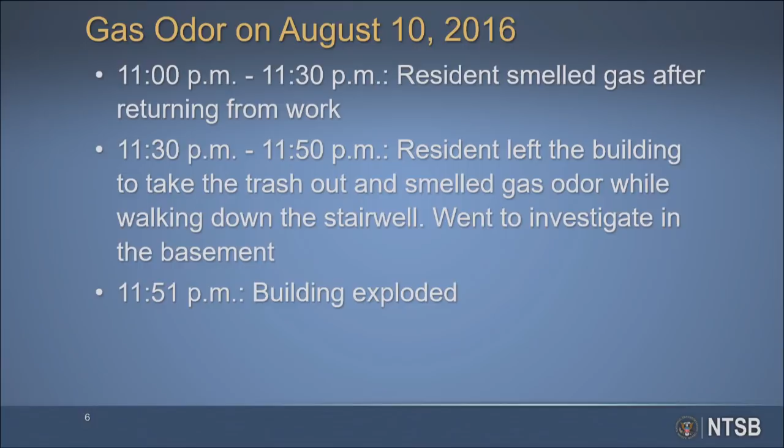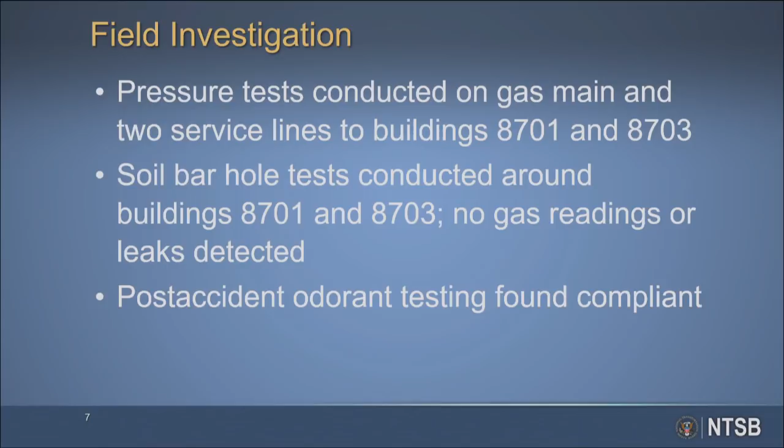NTSB investigators arrived the next day. Washington Gas conducted pressure tests on the gas main and the two service lines to Building 8701 and 8703. They also conducted soil bar hole tests on the main and service lines in the front and back of Buildings 8701 and 8703. No leaks were detected. Post-accident odorant testing was also found compliant with regulatory requirements for odorizing natural gas.

The Bureau of Alcohol, Tobacco, Firearms, and Explosives determined from the blast damage and pattern of debris that the explosion originated from the meter room in the basement of Building 8701. They concluded natural gas was the fuel source of the explosion and ruled out other sources.

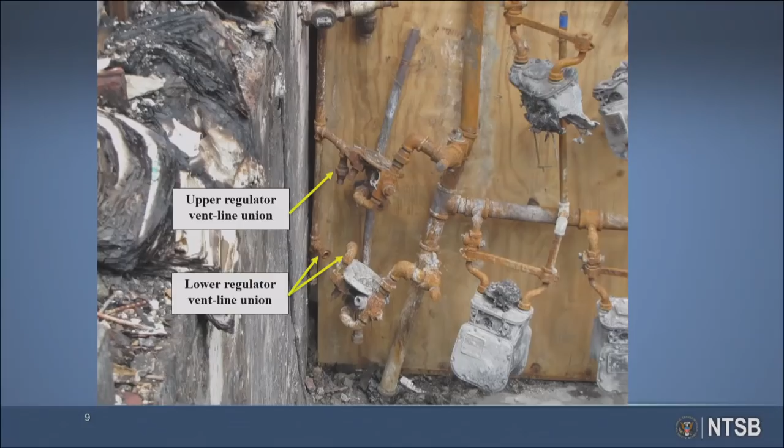Investigators narrowed down two potential areas where natural gas leaks could have occurred in the basement of Building 8701. One area identified was the vent line union connections from the gas meter assembly. Mr. Frank Zakar will discuss this in further detail in his presentation.

Investigators also considered a commercial water heater as a potential source of fuel, but there was no evidence that the water heater and its associated piping failed prior to the explosion.

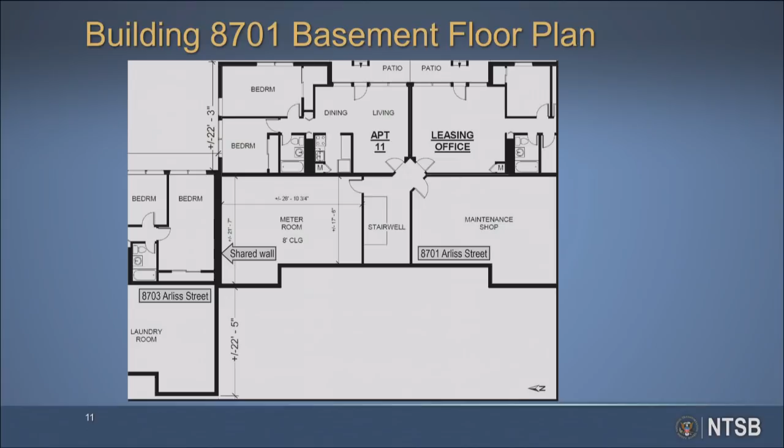Here is the floor plan for the basement of Building 8701, which included one apartment, a leasing office, a maintenance shop, and the meter room where the gas meter assembly and water heater was located. Right above the basement level were 12 other apartments located on floors 1, 2, and 3. The arrow indicates the shared wall between Buildings 8701 and 8703, where the gas meter assembly was located.

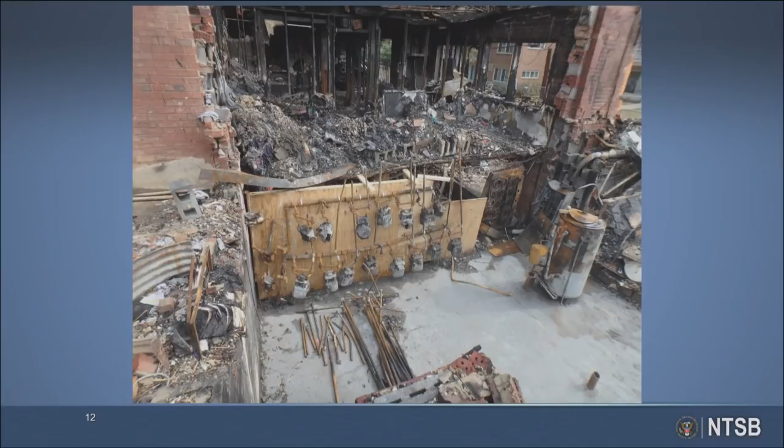Here is the ATF's reconstruction of the meter room in Building 8701 after the debris was removed. The gas meter assembly, the electric meter rack, and water heater were placed in its likely pre-explosion location. The gas meter assembly consisted of 15 meters that serviced 13 apartments, the maintenance shop, and leasing office. Mr. Zakar will also discuss this further in his presentation.

The safety issues for this investigation include the location of service regulators within a structure, the inspection of the gas meter assembly, notification of natural gas odor to the gas company, and natural gas detection methods.

The parties to the investigation are the Pipeline and Hazardous Materials Safety Administration, the Maryland Public Service Commission, the Montgomery County Fire and Rescue Service, the Montgomery County Police Department, and the Washington Gas Light Company.

I will turn it over now to Mr. Frank Zakar to discuss the laboratory examination of the equipment.

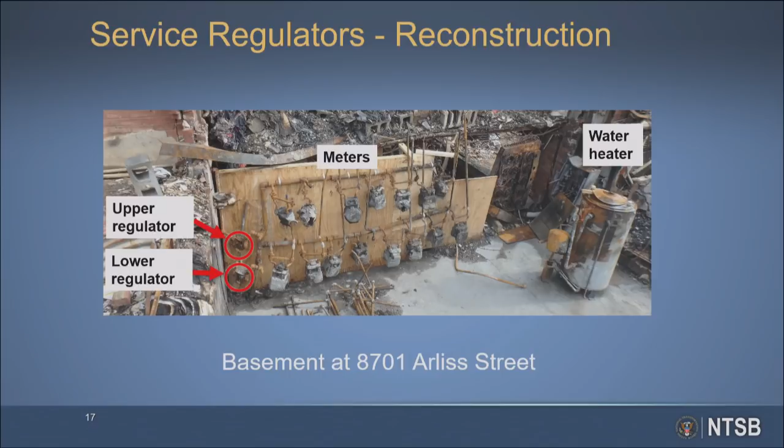In this presentation, I will discuss the examination of the Mercury service regulators and their respective union assemblies. This photograph shows the reconstructed configuration of the two service regulators, meters, water heater, at 8701 Arliss Street prior to the accident. The two service regulators were referred to as the upper and lower service regulators.

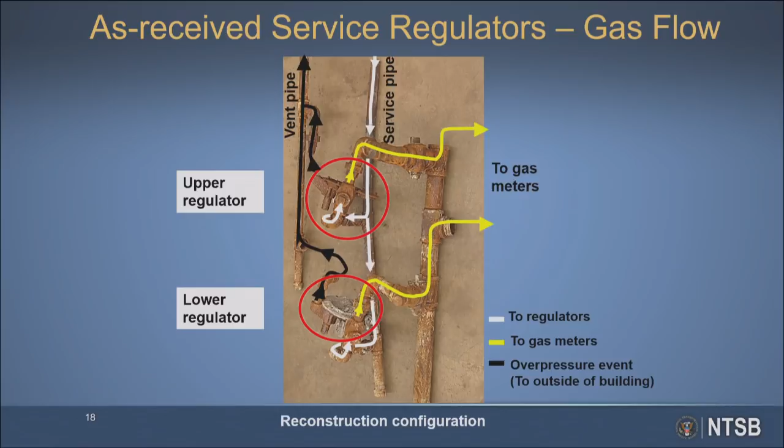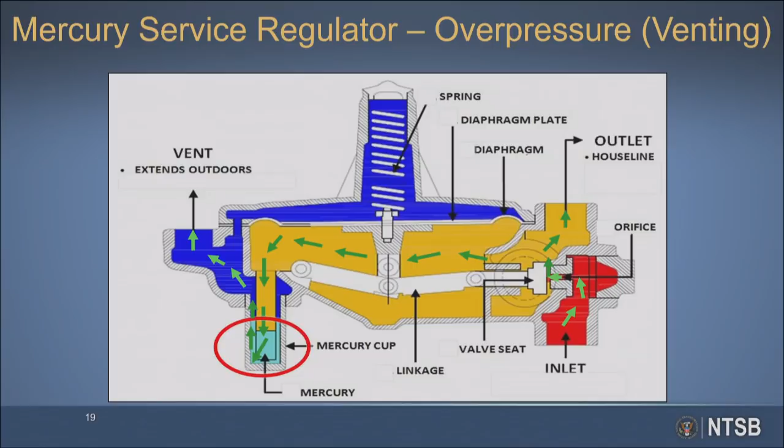Venting can occur when parts within a regulator degrade. For example, insufficient mercury level or a perforated flexible diaphragm can lead to venting. Material buildup between the valve seat and orifice can prevent the valve seat from fully sealing against the orifice, also leading to venting.

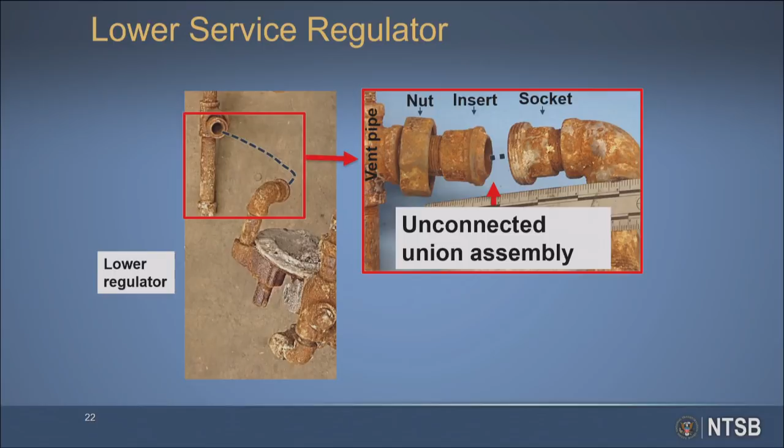The nut was found disconnected from the socket after the accident. When mating threads are pulled apart by force, fracture or deformation by shear of the threads can be expected. However, detailed examination of the internal threads for the nut and external threads for the socket revealed the mating threads showed no evidence of major deformation damage or stripped threads.

Had the force of the explosion, falling debris, or a building collapse caused the disconnect of the lower union assembly, there would be evidence of severe mechanical damage through the engaged threads. Based on the examination, NTSB staff believe that the socket of the lower Mercury service regulator union most likely was not threaded to the nut, and therefore the lower Mercury service regulator was not connected to the vent line prior to the explosion.

Malfunctions can and do occur in service regulators and lead to overpressure events. During an overpressure event, gas will normally flow through the vent line and terminate outside of the building where it dissipates. However, investigators found that the union assembly for the lower regulator was not connected prior to the accident.

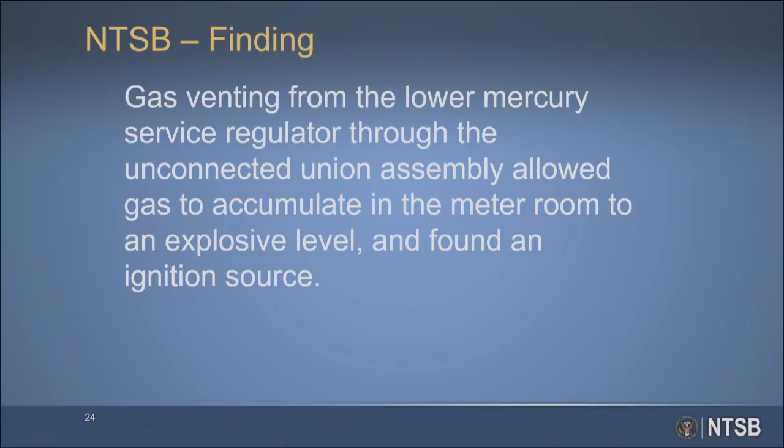NTSB staff believe that the Mercury service regulator past history, the pre-existing unconnected vent line union, the lack of evidence of any pre-existing anomalies in the gas piping or gas appliances indicate that a failed Mercury service regulator was the most likely source of the natural gas release in the meter room at building 8701. The gas accumulated in the meter room to an explosive level and found an ignition source.

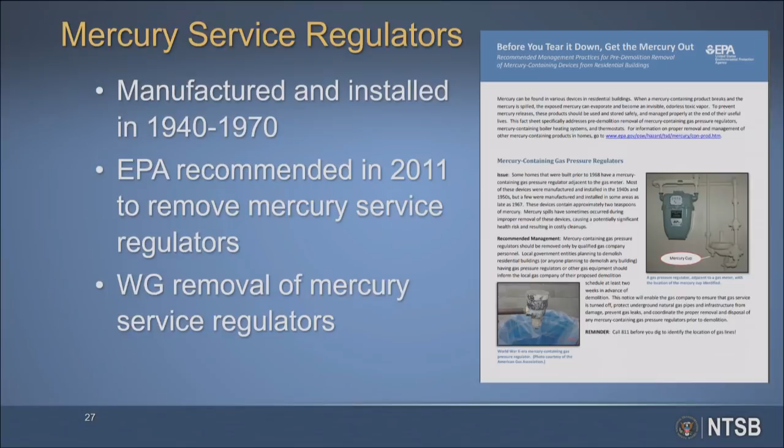Washington Gas has been replacing their mercury regulators over the years. As of December 2018, the company has approximately 125,000 Mercury regulators still in service. While reviewing the Washington Gas records, staff identified errors in the company's field entry forms which did not correctly identify the type of regulator in service. The company relied on unvalidated information to determine the location and condition of its Mercury service regulators. Staff proposes safety recommendations to address this issue.

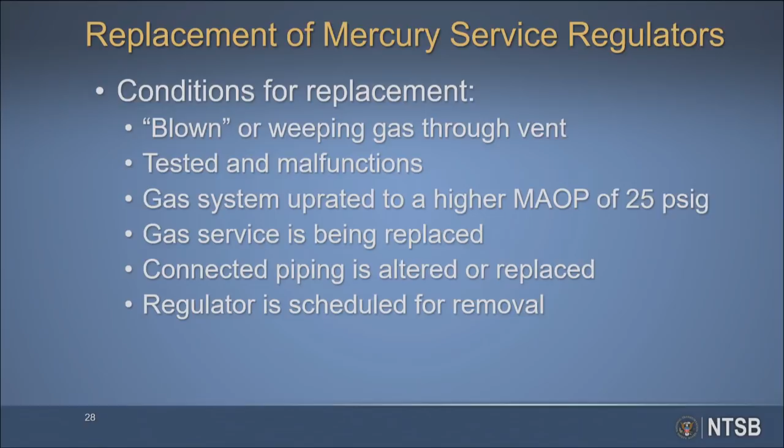In the Washington Gas Operations and Maintenance Manual, the company's procedures list the following conditions to replace a mercury regulator: when a mercury regulator has blown or weeps gas through its vent, when a regulator has been tested and malfunctions, when a gas system is uprated to a higher maximum allowable operating pressure of 25 psig, when gas service is being replaced, such as a meter change, when connected piping is altered or replaced in such a way that it makes it practical to change the regulator, or when the regulator is scheduled for removal.

In the 5 years prior, Washington Gas replaced 992 regulators due to performance failures. The primary failures of mercury service regulators include gas venting or leaking from a body connection or from debris or blockage to the valve seat, or mercury leaking out of the reservoir. Another failure mode Washington Gas has identified can be a torn diaphragm, but that type of failure was not recorded for any regulators found in their system.

Service records for the 5 years prior to the accident show that Washington Gas technicians visited the meter room at Building 8701 on 6 different occasions, 2 of which were to turn on gas service. Washington Gas procedures require mercury service regulators to be tested each time a gas meter is set, reset, or changed. Part of this procedure calls for a vent line test, which involves disconnecting the vent line.

to ensure the line is clear of debris and will appropriately direct the gas to the atmosphere. Washington Gas technicians told investigators that this vent line inspection was generally performed on single-family homes and not on multi-family dwellings such as the Flower Branch apartment complex. They only performed visual tests for debris and the outdoor venting of the lines. They did not check whether the lines were connected properly.

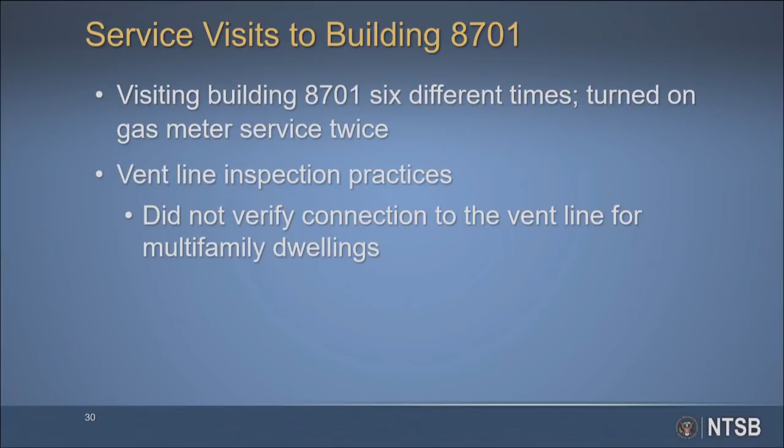Due to the potential of natural gas leaking from a disconnected vent line combined with a failed service regulator, staff proposes recommendations to address this safety issue.

Because both mercury service regulators from Building 8701 were significantly damaged from the explosion and fire, they could not be tested to identify what type of failure occurred. Staff participated in field testing at a Washington Gas facility, simulating certain failure scenarios using similar models of mercury service regulators. Those failures included a diaphragm tear, obstruction of a valve seat that would cause venting and leaking, and low mercury levels in the reservoir cup. Staff determined gas flow rates for these failed regulator scenarios.

The last person to leave the meter room was at 8:42 p.m. No reports of gas odors by residents or the maintenance crew occurred before this time. The explosion happened about 11:51 p.m., leaving a 3-hour time frame for gas to accumulate.

Using the flow rate data from the regulator field testing, investigators estimated the amount of time needed for gas venting from a malfunctioning service regulator to accumulate to explosive levels inside the meter room of Building 8701. Using a computational fluid dynamic model, the lowest flow rate identified could release a sufficient amount of gas in the meter room to create an explosive atmosphere within the established 3-hour time frame.

PHMSA regulations allow service regulators to be installed inside a building as long as they are in a ventilated area and at least 3 feet away from an ignition source. Each service regulator must be installed in a readily accessible location and near the service line entrance. And service regulator vents and relief vents must terminate outdoors.

The service regulators installed at Building 8701 were connected to a vent pipe that vented outside of the building. However, staff found evidence that a vent line union was likely not connected prior to the explosion, and with a failed indoor service regulator, this allowed explosive concentrations of natural gas to accumulate inside the building. Had the service regulators been located outside the building, gas from a failed service regulator would have vented safely to the atmosphere.

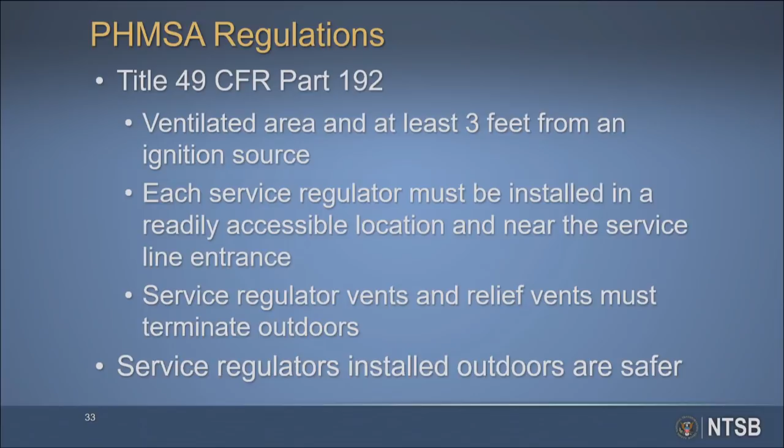Staff proposes recommendations to address this safety issue.

My next presentation will be on natural gas odor detection and notification.

About 2 weeks before the accident, an odor call was reported to the Montgomery County Fire and Rescue on July 25th. The same resident who smelled gas on August 10th called 911 to report a gas odor at Building 8701. The fire department arrived on scene and approached the building using gas monitors. They continued to check inside the building, monitoring for gas at each floor within occupied apartments and underneath the doors of unoccupied apartments, and detected no gas.

Firefighters attempted to enter the meter room with a key they would normally have access to. However, they were unable to enter the room because the locks on the door had recently been changed without the replacement of a new key. Firefighters did wedge open the top of the door to the meter room, but did not detect gas. Firefighters left the building and did not notify Washington Gas of the odor call.

Staff found that Montgomery County Fire and Rescue procedures for responding to a gas incident only require that the gas company be called when a leak is confirmed.

The 911 operator who received the call told the resident on the phone to evacuate himself and others from the building and not to turn on anything that would create an ignition source. Neither the resident nor the 911 operator notified the gas company. 911 operator protocols for gas incidents do not require the gas company to be notified whenever a member of the public calls in a gas odor complaint.

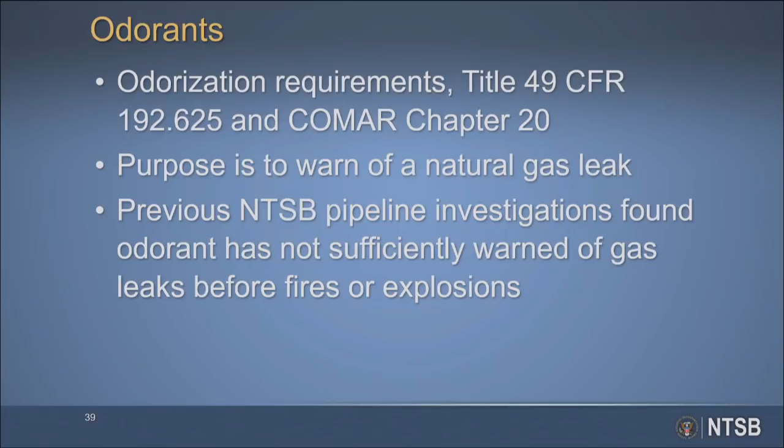The 7 residents who were killed in the explosion and fire on August 10th were located in apartments closest to the meter room. Had there been an alarm to warn of a natural gas release, residents could have been notified to evacuate to a safe place away from the building without relying on someone to smell gas odors. Currently, there are no federal or state laws in effect to require alarms to detect natural gas detectors that alarm in residential buildings.

Natural gas consists primarily of methane gas. Currently, the natural gas industry has been researching available technology that would trigger an alarm for flammable gas such as methane when detected inside a building.

The Operations Technology Development, a not-for-profit corporation involving a partnership of natural gas distribution companies, initiated the Residential Methane Detection Program. The program researched commercially available natural gas detectors and is currently in the testing phase of this technology. The OTD is advocating for a lower detection limit of 10% of the lower explosive limit to provide earlier warning of a gas leak.

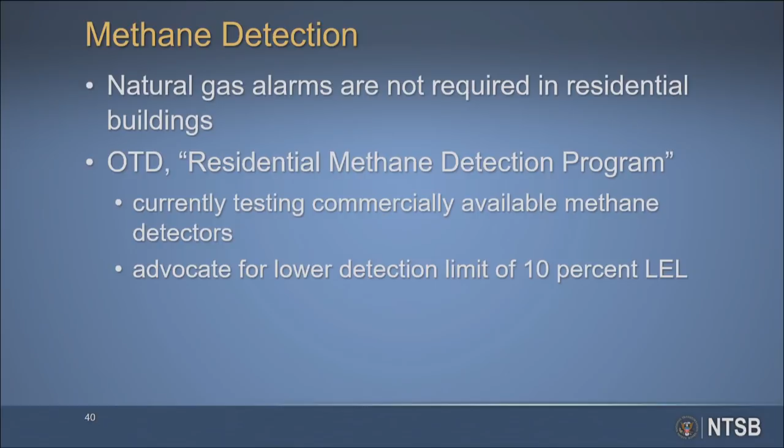Currently, there is one product standard, UL 1484, Residential Gas Detectors, that covers electrically operated devices that detect both propane and methane in residential occupancies. This standard is published by UL and provides guidance on the design and manufacturing of the alarm detector, and permits alarms to trigger at 25% of the lower explosive limit. The OTD has proposed lowering the detection limit to UL, which they have not accepted.

Currently, the National Fire Protection Association and International Code Council issue national gas standards that have been adopted in all 50 states. These standards provide minimum safety requirements for the design and installation of fuel gas piping systems in homes and other residential buildings. But the codes do not include any provisions for methane gas detectors.

Some states and cities are considering requiring methane detection alarms, such as the state of New York and New York City, who have had their own natural gas incidents. However, they are waiting for adequate industry guidance for this technology before implementing a requirement.

Staff believes the development of a national standard covering the performance, installation, maintenance, and testing of methane detectors is needed. Then jurisdictions can require this technology to be installed in residential and commercial buildings. This technology would be a redundant means of leak detection to supplement the use of gas odorants to help identify gas leaks and save lives.

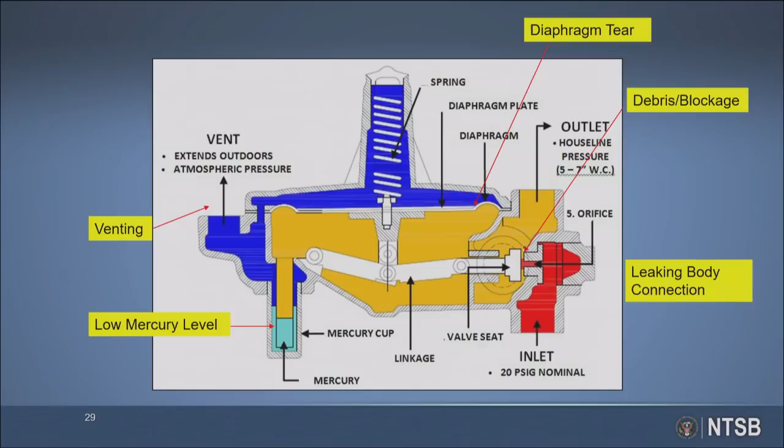Member Homendy: Thank you. Normally I would jump right into questions, but I actually have a few comments first, and I'll save my questions for the other rounds. First, I want to express my appreciation to the Director of our Office of Railroads, Pipelines, and Hazardous Materials, Rob Hall, and to the investigators, materials specialists, fire and explosion experts, and others who worked so diligently on this investigation.

Secondly, I want to thank the parties to the investigation for their work, including Montgomery County Fire and Rescue Service and the Montgomery County Police Department. This was a serious tragedy: 7 residents were killed, 65 others were transported to the hospital for treatment, and 3 firefighters were injured.

In the days and months that followed, Washington Gas should have been laser focused on the safety deficiencies that led to this incident and what could have been done to prevent it from occurring. On June 17, 2017, and again in various meetings with board members a few weeks ago, Washington Gas submitted comments to the board stating that because the ATF concluded the cause and origin of this accident was undetermined, the NTSB should also conclude that the cause and origin was undetermined.

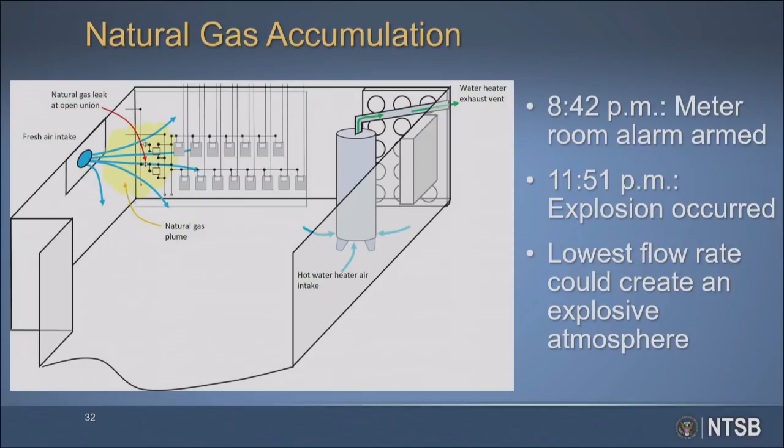The draft report states that as of December 2018, Washington Gas has replaced about 175,000 mercury service regulators throughout its system and has about 125,000 regulators still in service. Some of these were replaced due to venting or a leaking body connection. What concerns me is whether the 125,000 figure is accurate. During questioning, Washington Gas stated they are unable to provide exact numbers of remaining mercury regulators due to multiple changes in the means for which the mercury regulator installation, maintenance, and replacement data was captured over the years. Can you talk about this? How does Washington Gas know that there are only 125,000 left to be replaced?

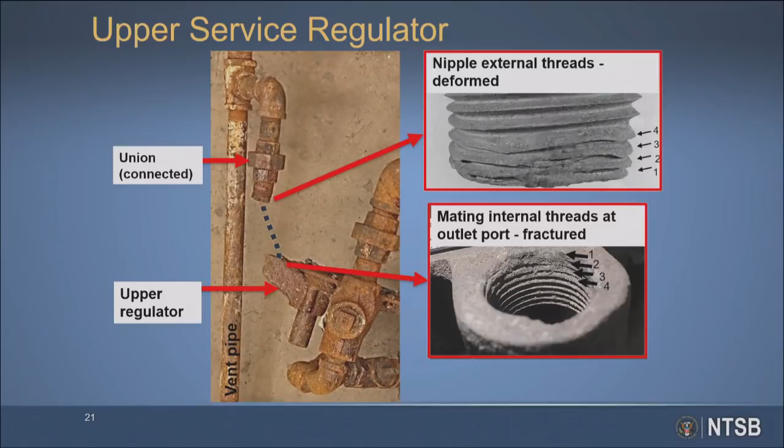So the bottom line is, we can tell that this was thread pullout, which came under force, which was more than likely a result of the explosion. That's correct. Okay, let's go to slide 23.

What we try to prove is whether or not there was thread pullout. Had there been thread pullout, we would have seen severely deformed threads or a scar from thread pullout or thread stripping. The fact that we don't have any of this on the threads indicates that these parts were not connected at the time of the accident.

Okay, thank you. Now, yesterday, when I went to the lab, we talked about some of these union assemblies, and there was one that you could actually insert for a couple of millimeters before it would mate, and then you could thread it. Can you talk about that?

Yes. After we completed our physical examination, we decided to do one more experiment or exercise. We decided to take the lower regulator, the union for the lower regulator, that's the one we had found unconnected, and we decided to put it back together.

We attached the nut to the socket, and we found that we were able to engage the threads of the union. We were actually able to put it together, and once we completed that task, we tried to pull it apart by force, by hand, and we could not. That indicates that the union assembly had the capacity to hold together.

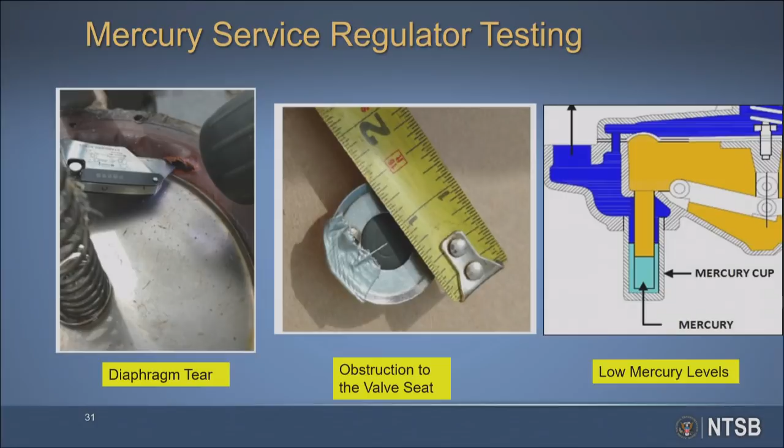We don't know, because we had fire damage and we can't tell. And what makes us then think that this was in fact a failure of the regulator?

The process of elimination. We were talking about the water heater before, why we don't think it's the water heater. It's process of elimination. Our investigators did not find any evidence of any other disconnected or leaking pipes, and so it's a process of elimination. And the fact that regulators do fail, and once we have an open union, that possibility of gas leak that goes out of the union will eventually wind up in the basement.

Do we have any evidence?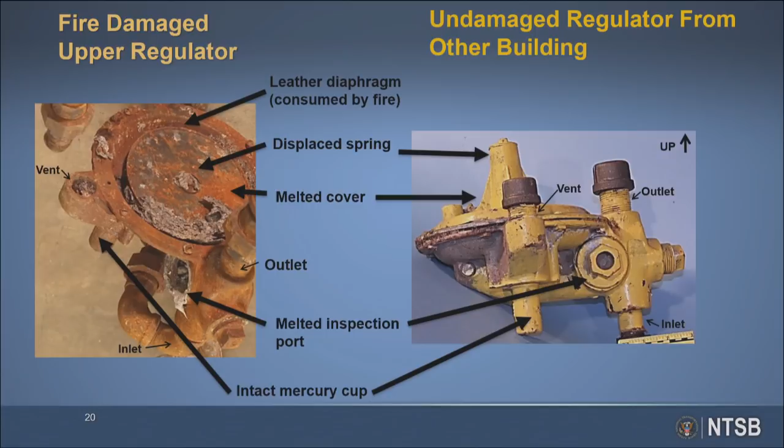We've got a proposed recommendation for Washington Gas to come up with a replacement schedule and recognize the need to expedite the program to prioritize replacement of mercury service regulators. That's pretty loosely summarized there, but do we have any evidence that mercury service regulators have a higher failure rate than other regulators?

No, we don't have any failure rate data. We do know that they've had failures. Washington Gas did provide us data that of their own mercury regulators, they've had almost 1,000 that have failed due to one of those three failure modes we saw up there. So they do fail, and they can cause a lot of damage.

But if we replace them with another type of regulator, is there also a failure problem, potential failure rates with those as well? Well, that would be a newer device, and mercury regulators are outdated. I mean, they were last installed in the 50s. I mean, they're going on 60, 70 years now, and so the internal components will wear down, they will break down.

The mercury service regulators have a long history, so eventually there's a possibility that they will fail. Most of the new regulators going into service are fairly new compared to the mercury regulators, so I don't think we have the full numbers on how many are failing, but certainly they're not as old as the mercury regulators. So just because something is old doesn't necessarily mean that it's going to fail, but when we start talking 60 years old, I start worrying about that one.